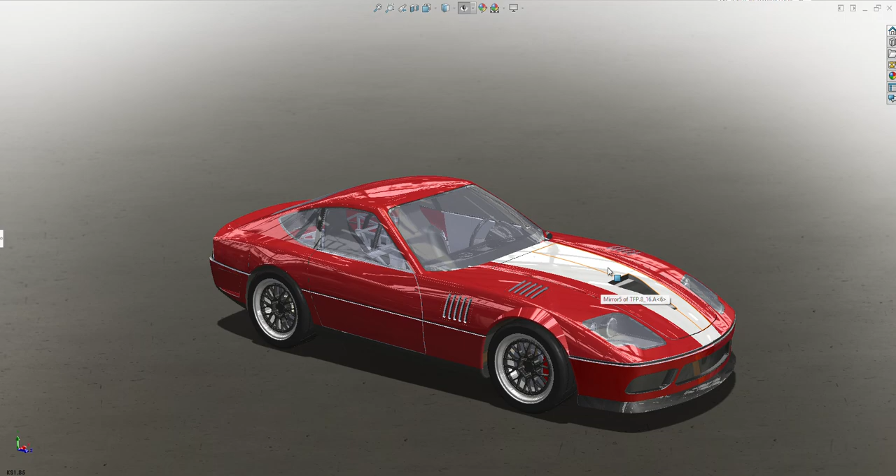So what we got here is version 4 of the car that we've been printing, and this is the quick rendering that SolidWorks will do. So you can see we've got the body.

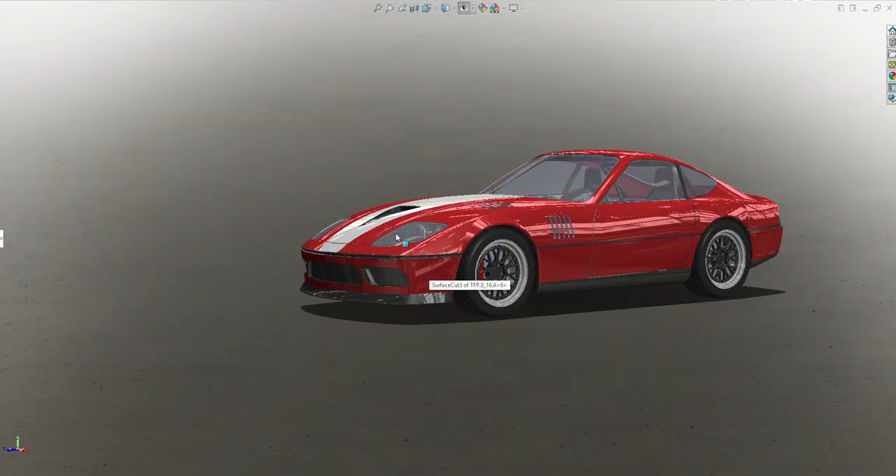I actually made the whole body in SolidWorks, and believe it or not, I just started with a solid chunk and then worked it down loft by loft to get to the final shape. I found it was easier and sturdier to do it that way because I tended to be able to regenerate parts quickly, and when I made changes to shapes, they were more likely to become defined 3D objects without errors. So I made the entire shape of the car.

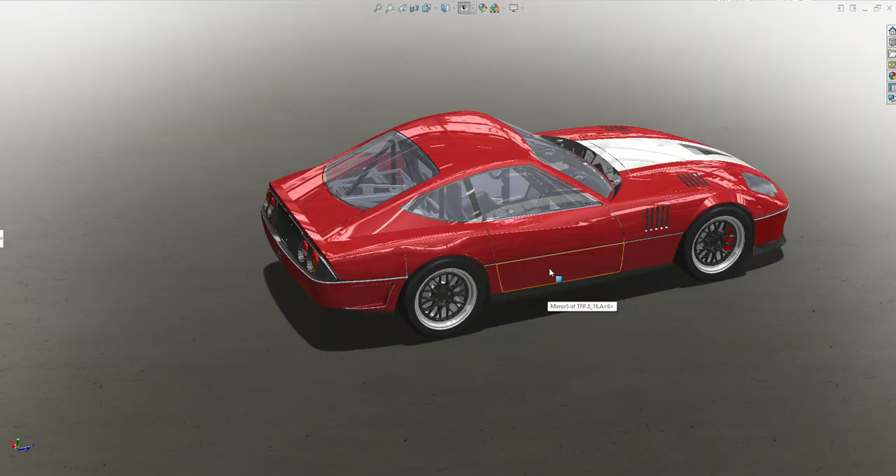It didn't just take a day or two, it took years. But this is where we are right now, and you can generally get an idea of what it looks like.

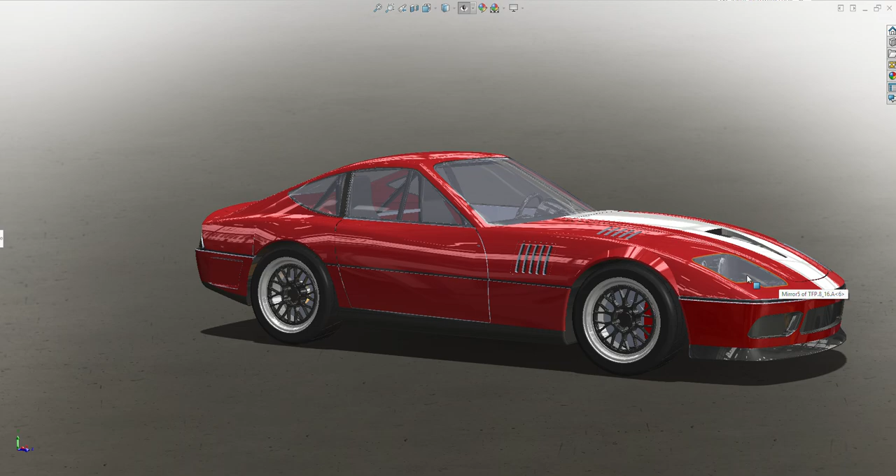It's about a 90-inch wheelbase. It's based on that Factory 5 chassis, which I'll show you in a second. It's about 45 and a half inches high, and it's got 4.5 inches of ground clearance. So objectively speaking, there's nothing crazy about the car. It's got plenty of ground clearance and plenty of height to get in and out. It's not that wide, maybe an inch or two wider than a Factory 5 type car.

Maybe it's 70 inches wide total in the back, and we can fit, I think, 315s in the back of this car with this current setup. So that's the body.

What I did is basically made the car body, made it a solid, and then chipped away at the faces to give me this kind of shell. Then when we 3D print parts, we take the shell, thicken it, and then cut it up. I'll show you a little bit of that in a second.

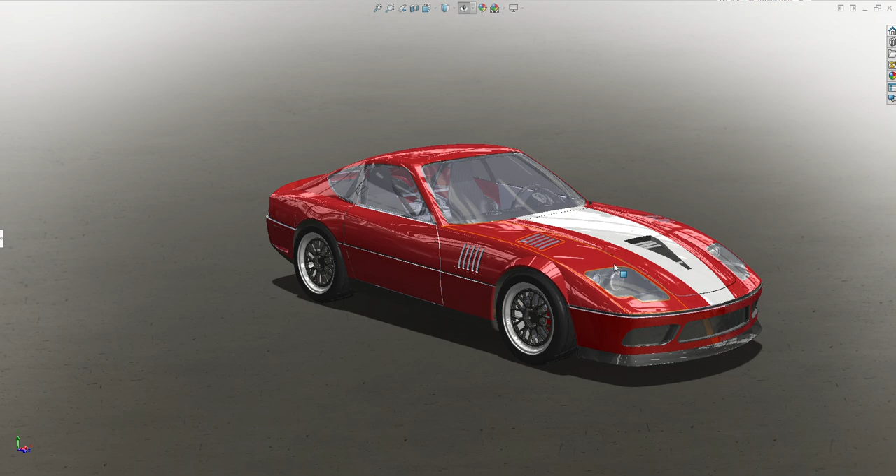So here's the body, and then I just want to show you the frame. If I just hide this guy for a second, you can see the frame. This is the Factory 5 frame right here underneath.

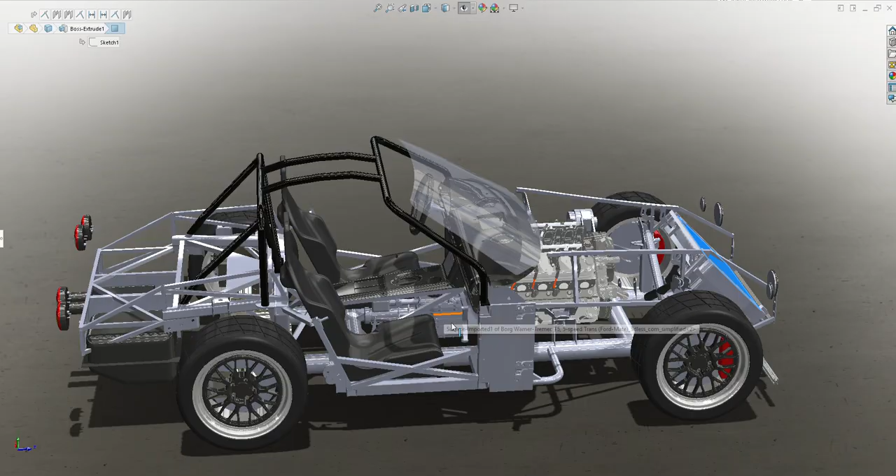And I got the LS3 there. I've got a lot of parts that I made on that LS3. Got the Cold Case radiator there, of course, and the trans—although that's not an accurate trans, it's at least in the right spot.

You can see this is the Roadster chassis that you can get from Factory 5. It's been cut up a lot, but the frame or the bones of it is the same, and you can see where I've got the motor mounts sitting in there and whatnot.

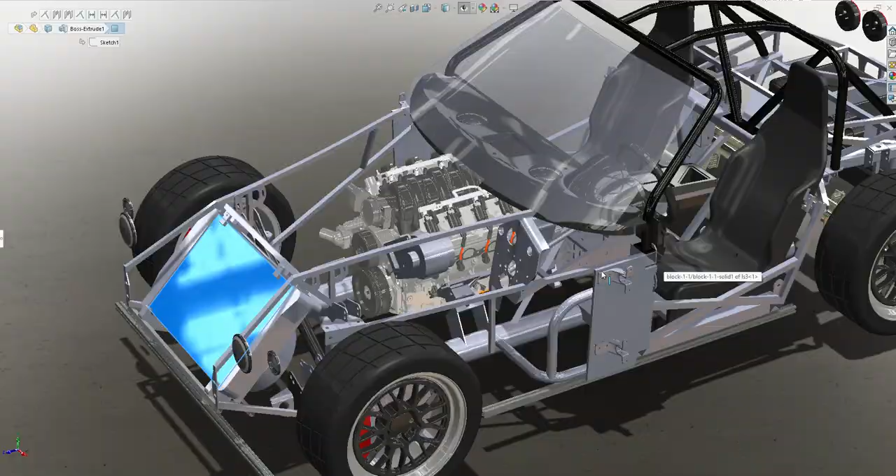It's really cool—we sketched this frame up and drew it from scratch, so it's pretty darn accurate. And it's nice because it's in SolidWorks so we can tweak it and do whatever we need to it, like cut parts off. We trimmed a lot back here to get things like the windshield to fit in.

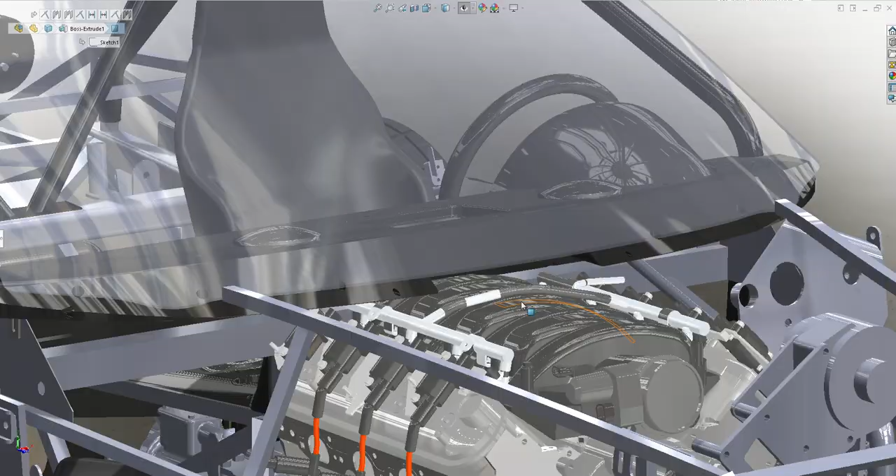This is actually a really good way to show how the clearance is on this car. This is the top of the LS1, this is the LS1 intake. Look at the bottom of that windshield—there is not much room at all.

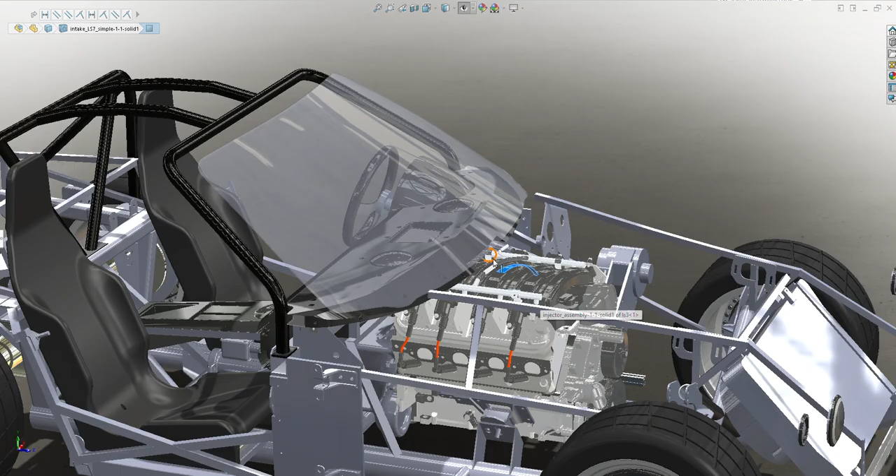The problem we had with the Ford 302 is that it was a really great compact engine, but the carburetor sits in the center and the air filter has to go above that. So when I did all the videos of that car, it was actually running without an air filter because it would physically interfere with the windshield. The throttle opening blades were barely clearing the windshield when we drove that car.

That's why we had to switch to an LS1 and pick up another 100 or 150 horsepower too. It's not the end of the world, but I really love the way that 302 Ford sounded. Anyway, back to this car.

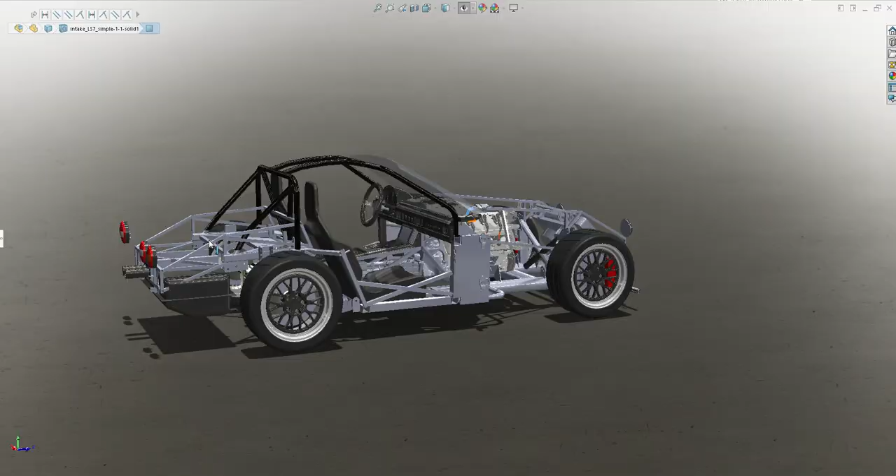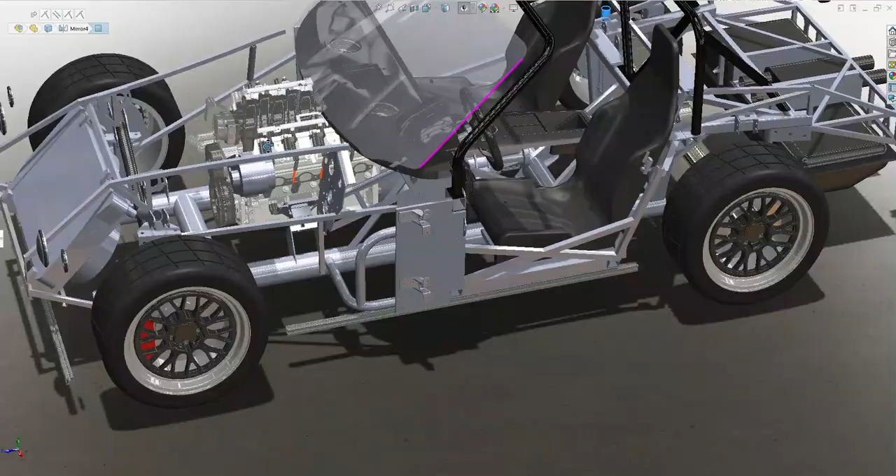So we've got the stock Mustang gas tank in there, our center Flowmaster exhaust, and a roll cage that we'll be making and putting in the car, bolting and/or welding it to the frame and using a lot of the Factory 5 pickup points for the tubes. This should hold us in at the track—goal is Homestead and Sebring to begin with.

And these are some custom wheels that I made and designed. They're 3-piece wheels, and we'll hopefully have them made soon, so stay tuned. That was a lot of work, but I printed out some versions of these wheels in plastic and they look incredible, so I can't wait to do that.

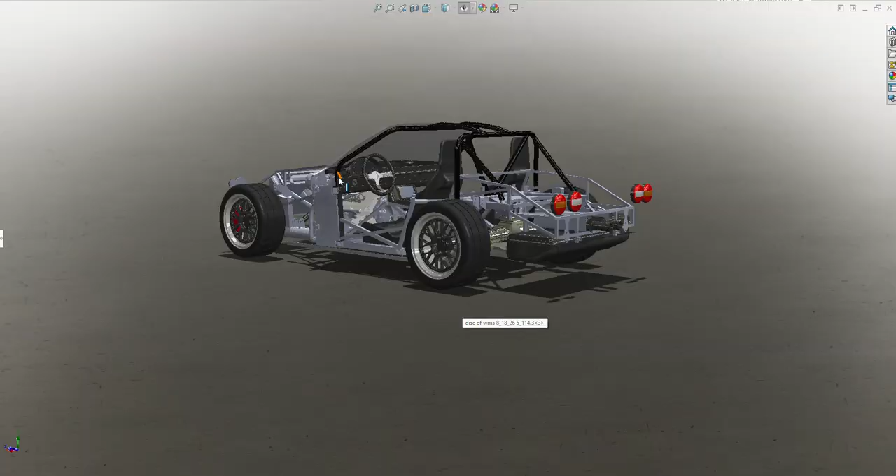We've got the 3D dash here—check that guy out, it's just like it looks in the car. We split it into parts to print it. It's got all the vents in there, a light switch—ironically this is like from an early Saab 900, this light switch, and I'm a big Saab fan. Then it's got the gauges fit in here in the binnacle.

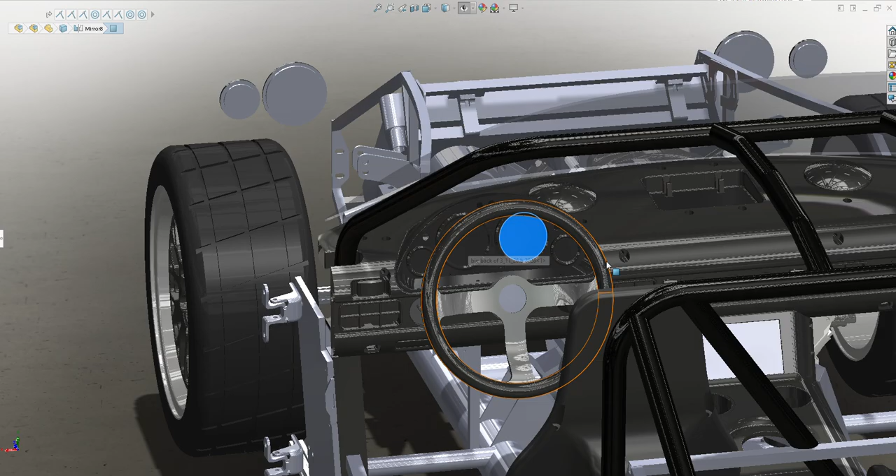We've got our Alpine stereo right there—it actually fits, I've put it in. And the center console is drawn up right there to accept 2 iPhones side by side, plus speakers. So we're actually not that far away from having a real, running working car.

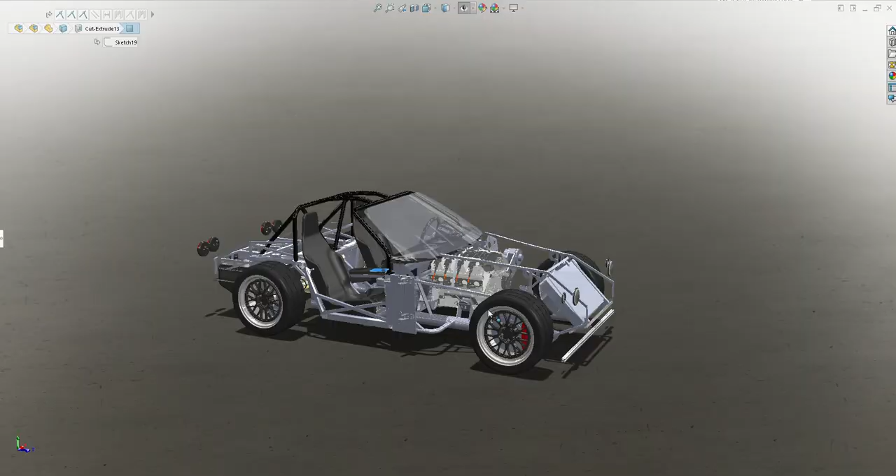So let me see if I can show you what the 3D parts look like when we go to make them.

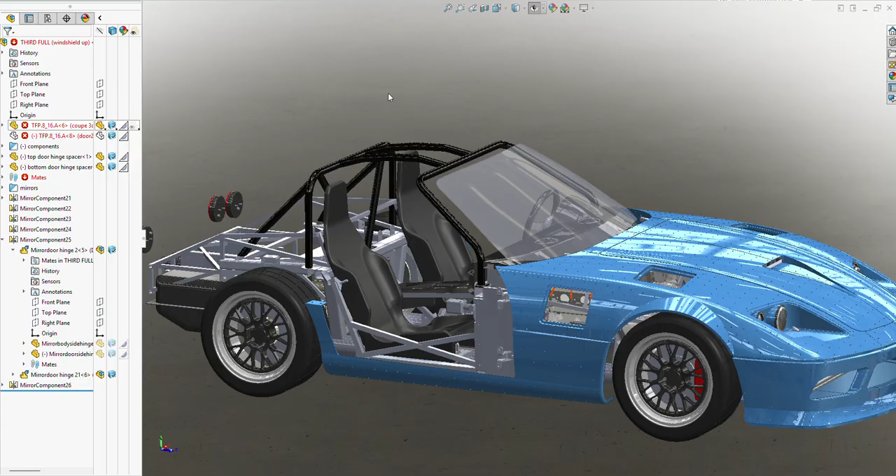Okay, so we have this body saved in different configurations. The configuration I'll go for right now is the 3D panels. It may take a couple minutes to load, hopefully less. All right, there we go. So this is where we are right now, the stage in the build.

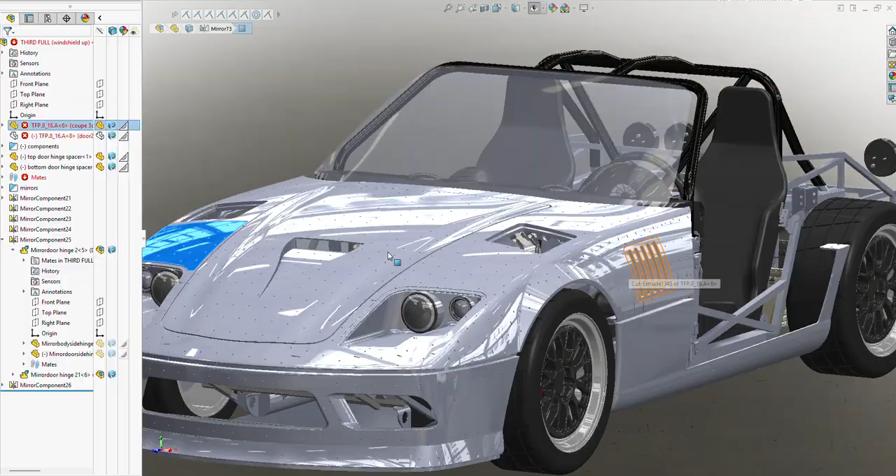The hood has been printed out. It's on the car, you've probably seen it. It's got all these little holes, these are through holes to help the carbon fiber on the outside bond through the ABS plastic, probably to a fiberglass layer on the inside, and that should give us a lot of strength. I know we've already done the hood, and it is really, really rigid.

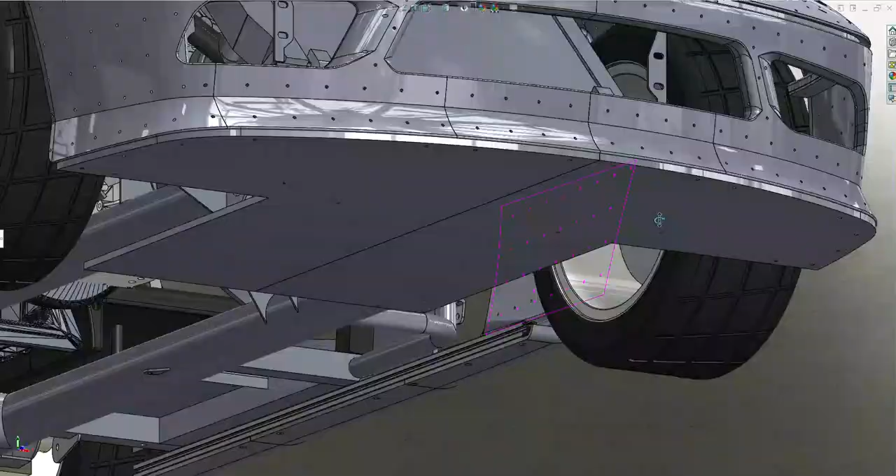Let's see what else we can show here. You know what, let's show the lines if we can. So in this view, we can actually see all the different lines in the car. These lines correspond to different breaks in the parts. Those breaks correspond to basically how big the printer can make a part.

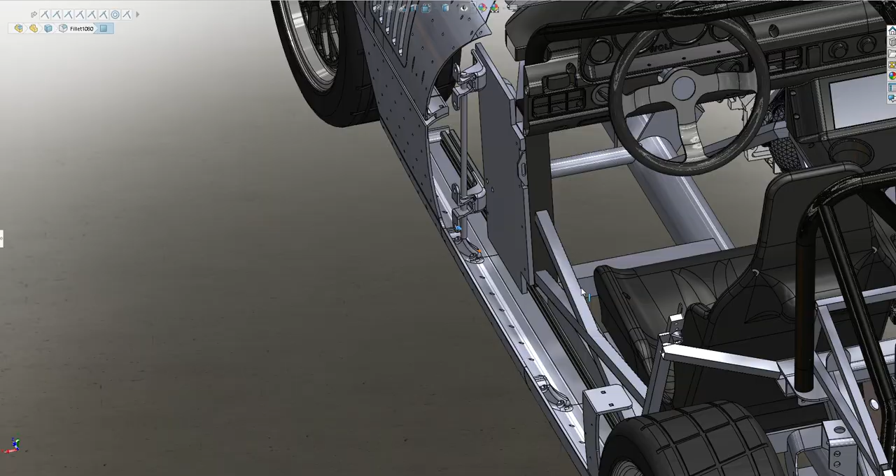So this would be like the first rocker part, and it has a joint right here. You can't see it great there, but that joint allows us to run carriage bolts through from this panel to that panel, and then we use epoxy to bond these guys together. So see, you can see it right there, it's got the carriage bolt recesses. And that gives us a really nice rigid body.

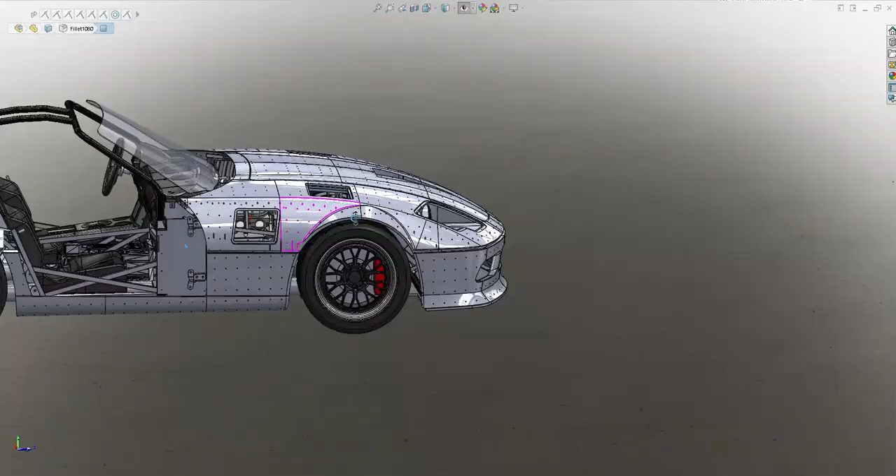And this ABS is very, very light. It's printed with almost no infill, just 1 or 2 perimeters, with a 0.8 nozzle, so it's very light. When we add the carbon on the inside and the outside, I don't know if this body is going to be much heavier than a normal body, but I think it might be just as strong as a really good fiberglass body, because I've had this hood and thrown it around the shop and you cannot damage it. And that's with the carbon fiber already on it.

So you can see the panels, about 2 feet by 2 feet, that's about the size of the print volume we have, by about 5 millimeters or so, a little less than a quarter inch in thickness.

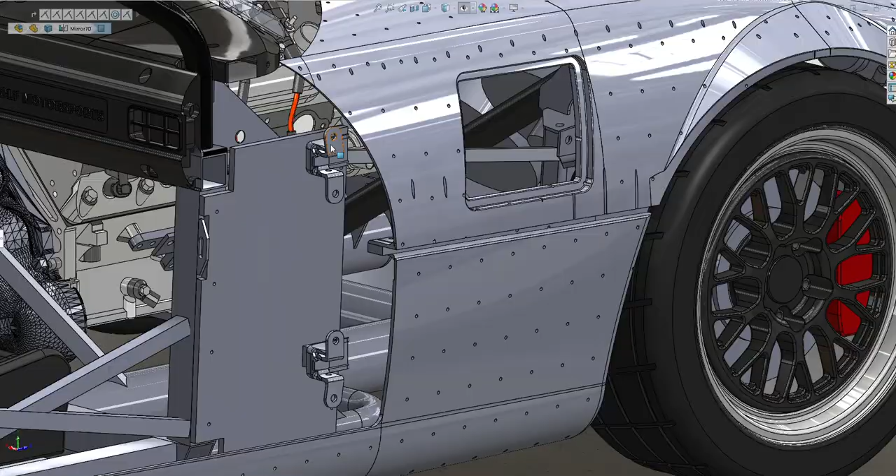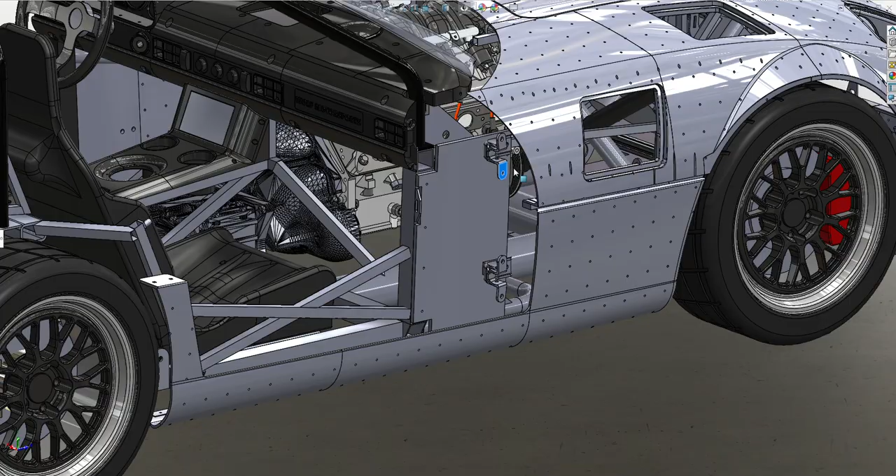We've got our Hyundai Genesis door hinges right here, which will allow us to bolt the doors up. We're making this panel right now because the Factory 5 doesn't have a lot of great mounting options for doors, since they're just little shells and really tiny for Cobras. So we have to make a more formal structure to mount these door hinges on. That's what this is, a formal structure. I'll be drilling some more holes in the frame to secure those structures down.

What else can I show you here? We've got just about everything installed in here. Whenever I come up with a new part to put on the car, I try to put it in the model, just so we don't have any weird surprises that pop up. But there you go, that's about it.

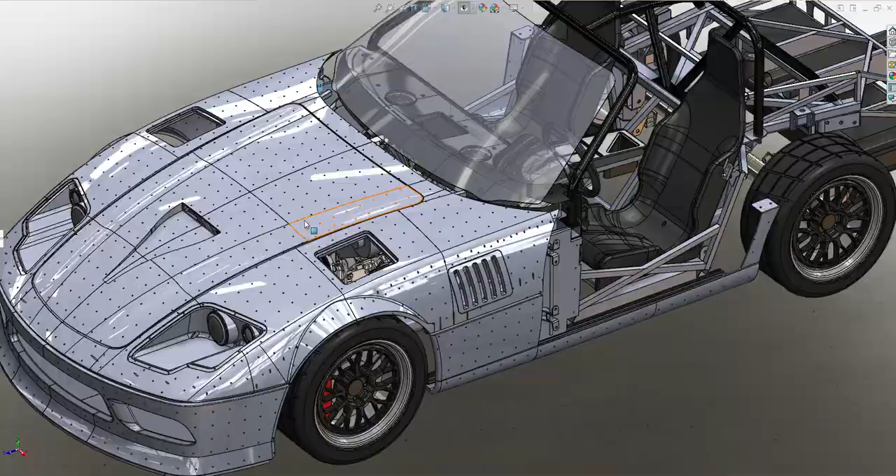I don't have these vents in here yet. These are going to be venting the front tires, and these vents will vent the hot air from the engine compartment. And then we'll put a nice mesh behind the front grille here. But you get the idea.

That's where it is. These are the front headlights that we get from Amazon. Super affordable, unbelievably bright at the same time.

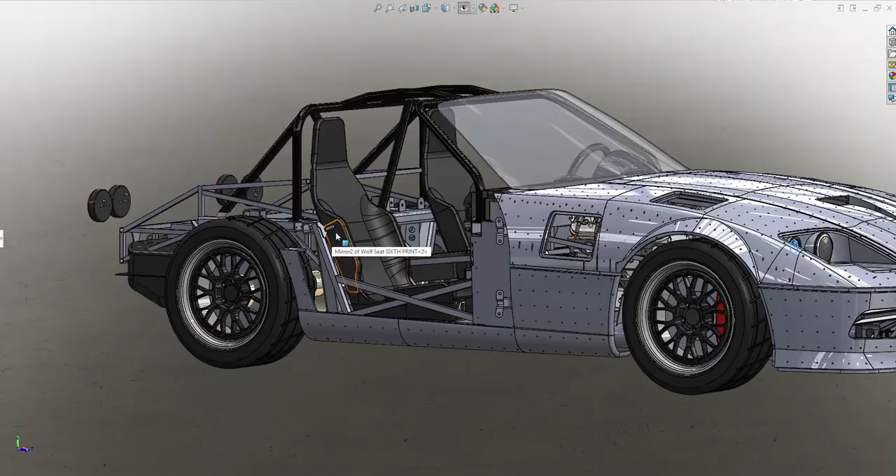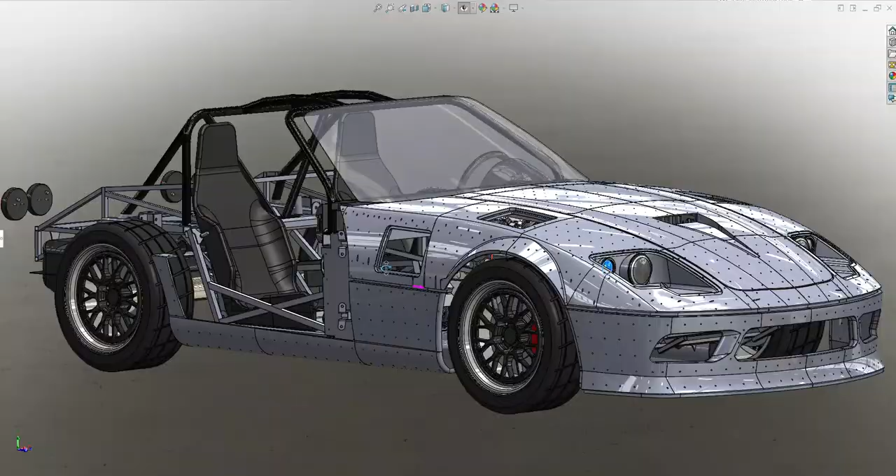But that's the car. I just kind of want to show you the background of it, how it actually goes from your design to this 3D printable piece that's then cut up and made on the 3D printer. And then we'll take these pieces and put them on the car, sand them, put some carbon fiber on them, and then probably paint over the carbon fiber at the end to get a nice show car type finish. Oh, and of course, I almost forgot.

These are our seats, I think the 6th version of the seats. These are not on the car yet, but they're hopefully a little bit easier to get in and out. They've got some support throughout them, a little bit more than the original seats, and they've got the bolsters in the back here. And that's about where we are.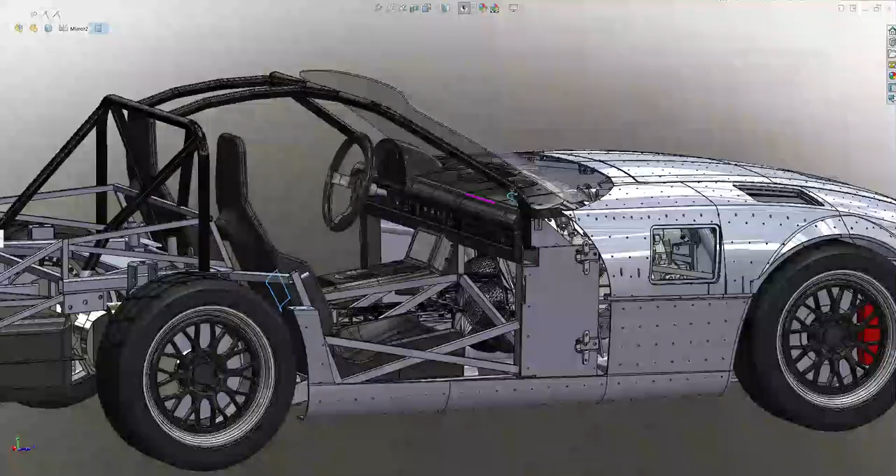It's really exciting to do this. I've done this, I think this is the 4th version of the car, and each time I do it, the car gets a little bit better looking, it gets a little bit more put together, it feels a little bit better every time you drive it.

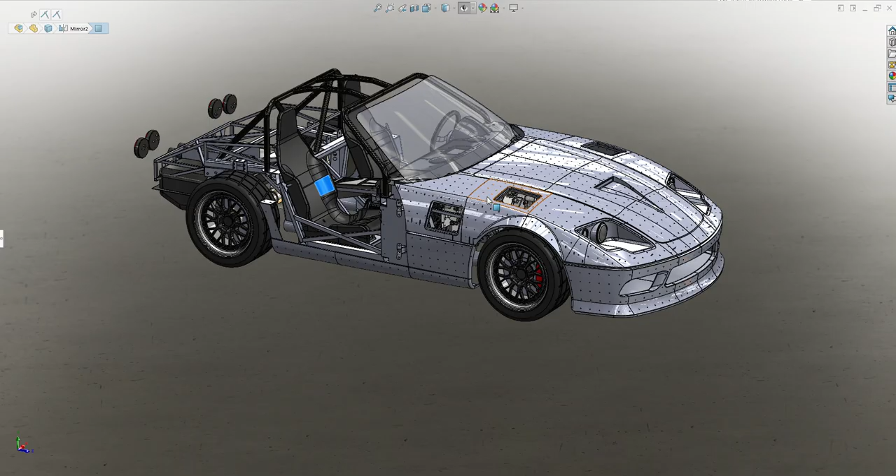And this time I'm really excited because this one, we have the 400 horsepower engine in it, and we have really nice, good brakes all around on it, and I think the car is just going to absolutely fly. So thanks for watching.